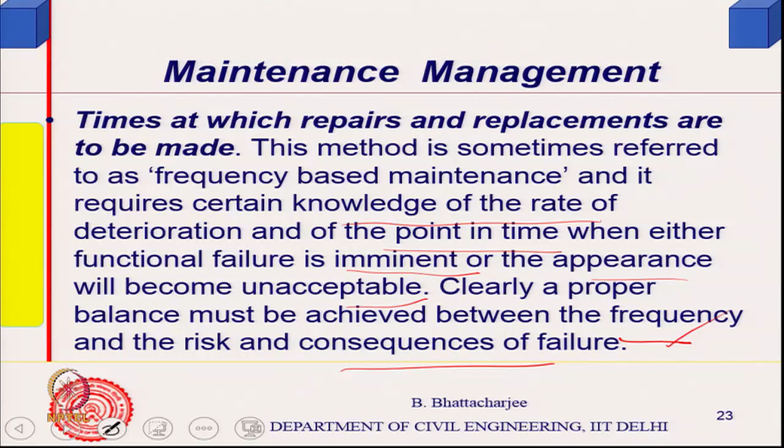So, based on that you decide a frequency: I will do the replacement of all the lamps at a given time. But at what percentage of lamp failure you will do a complete replacement will depend upon the cost implication if you do not do it, the indirect cost implication, because your production might stop. Not all situations will be similar; different functional buildings will have different issues. So, it has to be a balance between frequency and cost implication. If it stops your production, then obviously you will be more bothered.

In some cases, for example, the humidity not maintained in a textile or garment factory, where fibers change their dimension with relative humidity, the production system might get disturbed. So, these are the indirect implications. So, the same item might be put either in condition based or frequency based, but you will have to decide how you want to handle it.

Then there is a third variety, finally the financial criteria, which could take the indirect cost of not maintaining and the direct cost of maintenance. The more frequently I do it, my cost of maintenance will increase, but if failure of the system has a very strong repercussion, then obviously I have to take care of that.

Say in a hotel, for example, I've got to do it on a war footing basis, because the financial issue is involved: my return, the occupancy level, depends upon that. So in some cases it would depend on some sort of a sum related to the cost of some primary activity. The primary activity in a hotel is actually renting it out, right.

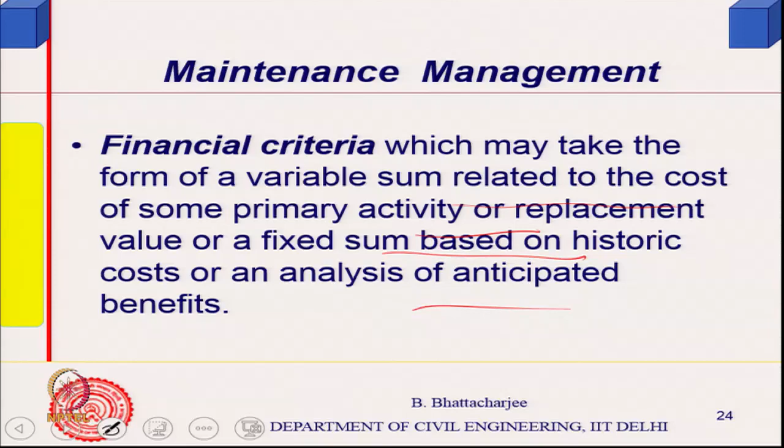So, if replacement affects that, or some fixed sum based on historic costs, if I do not do it, what will happen? So basically economic analysis will dictate. Some items will be simply based on economics. I said that carpets change in hotels, nothing goes wrong, but they do not want the same look, because people who come in have a better feeling. So, just change; nothing has really gone wrong, not condition based, just financial implications, and finally make it frequency based. So, this is how it would be done.

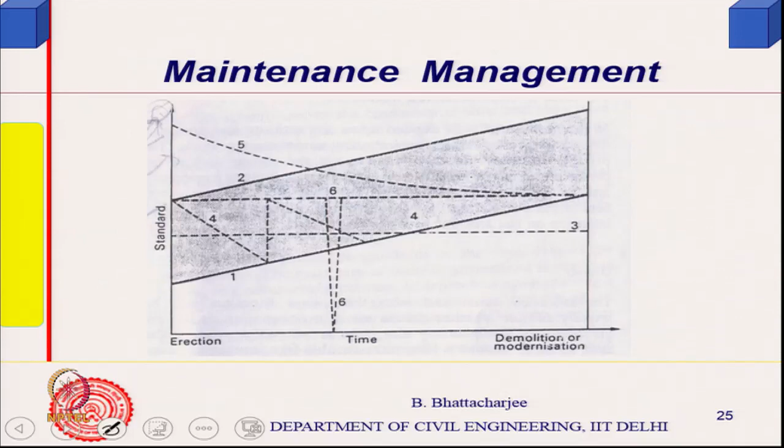So, this is the same diagram that we are talking about. Now, out of this same diagram, let us see how we go about it. But before doing that, we must also understand one thing, as I said, that financial criteria or frequency based or condition based, all of them, particularly the latter two, depend upon at what level I want to provide the basic maintenance objective.

For example, if there is no financial implication, I do not need a good level. Say some factory or real estate business is providing housing for a group which cannot afford a very high price. So, for them they will keep the standard at a low level. Therefore, your frequencies etc. will all get related to that, right. The maintenance objective will be different. So, maintenance objective, periodicity, everything depends upon the level. So, we must classify the level, and we classify it in 3 different levels.

Levels of acceptability: limiting this to habitable or working areas of a building, it is possible to distinguish 3 broad levels. This is a qualitative level. For example, the lowest level is that level where the immediate environment should not be directly harmful or uncomfortable. You are merely maintaining hygienic conditions and just comfortable conditions.

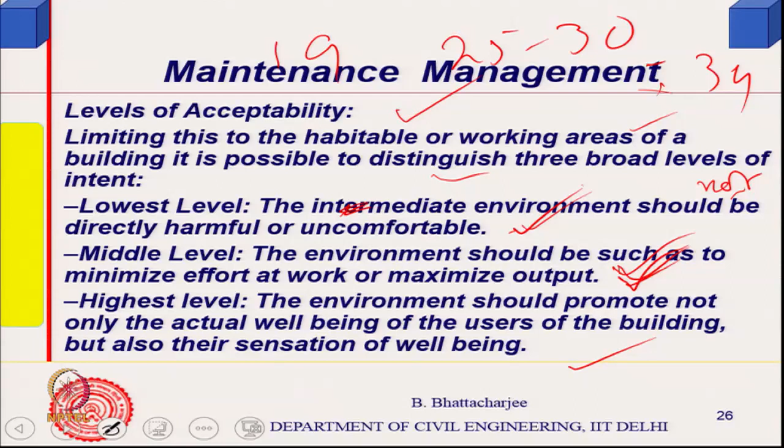where it should promote not only actual well-being, that means it shouldn't only maintain the comfort level, but you should also feel that it is actually very comfortable, or you take a pride in it. So, that is maybe the scenario of a 5-star hotel, where the pride is very important. Somebody says it's not only comfortable, I also feel that it's very comfortable. So, psychological well-being, a psychological feeling that it is better, not simply comfortable.

So, these levels of acceptability have to be decided. Then you can plan your periodicity. So, that is how we do it actually. Now, let us see how we find out periodicity for some of the items at least, right. These are the levels, but the examples I will take will not distinguish the level; they are general, some way how we find out.

Now, how can we find out? One is where I know the deterioration process, the slow deterioration process, and I bring it back. Roof covering is one such example. With roof covering, it is not a question of 2 years, 3 years, 5 years; I am talking of a time span of 60 years. So, 25 years might be required for roof covering to show up its problem. So, after how many years should I actually change the roof covering?

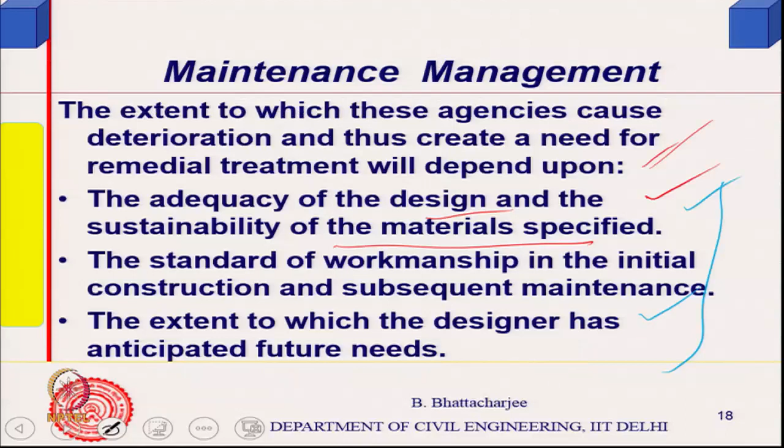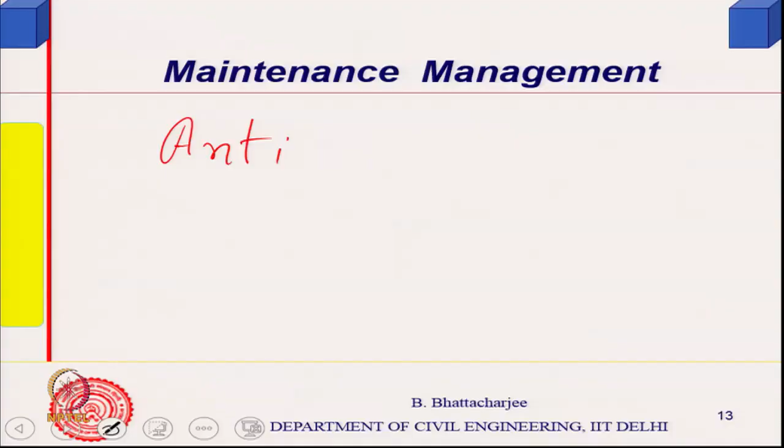So, first we take the case example of a roof covering, recycling of roof covering. In such situations we define something called an anticipated state matrix. Certain items we do like this, where the deterioration process is relatively slow, and when deterioration reaches a certain level, it is not economic to do the maintenance. So, we call it anticipated state matrix.

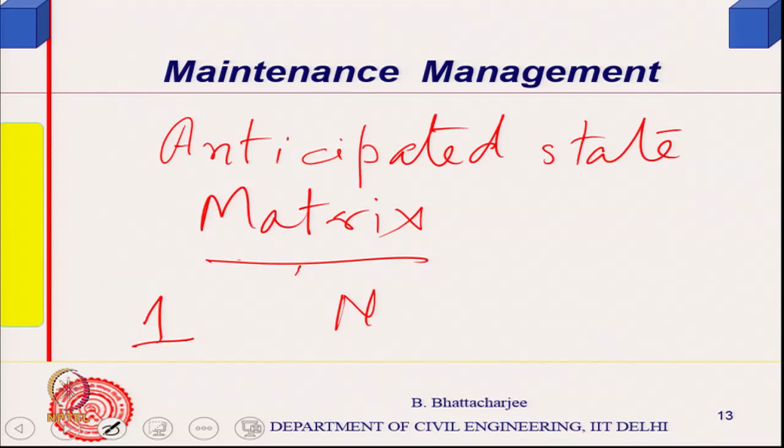Anticipated state matrix. Now, what is an anticipated state matrix? We define states: state number 1, no visible defect. Then 2, something like isolated. Now, in the case of roof covering, it depends upon which part of the country you are in. In the northern part you have a structural element, then an insulation element, then a waterproofing layer at different levels, and then some roof covering tiles right at the top.

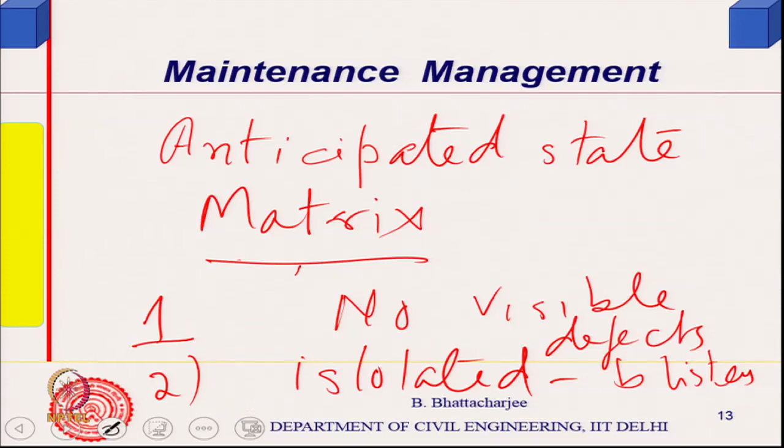And with these tiles, supposing moisture ingress has occurred, the tiles will start coming up, what we call blistering, as if blisters have appeared. So, isolated blisters. Then the next stage; so states are actually defined, and the extent also we might talk about. The tiles have gone away from the area, tiles have disappeared or something like that. So, these are anticipated states.

Right. In some cases the visible state could be visible internal insulation, something of that kind. So, you define anticipated states as you are likely to see once the roof has been constructed for many years. Now, this must come from past experience. So, you define the anticipated state matrix, we call it. So, anticipated state we define.

Then we talk in terms of: after 5 years, how much area will have no visible defect? Or it would be possibly 100% after 5 years. So, in each state after 5 years, how much percentage will be in isolated blister? So, one of the columns would be 5 years, then next is 10 years.

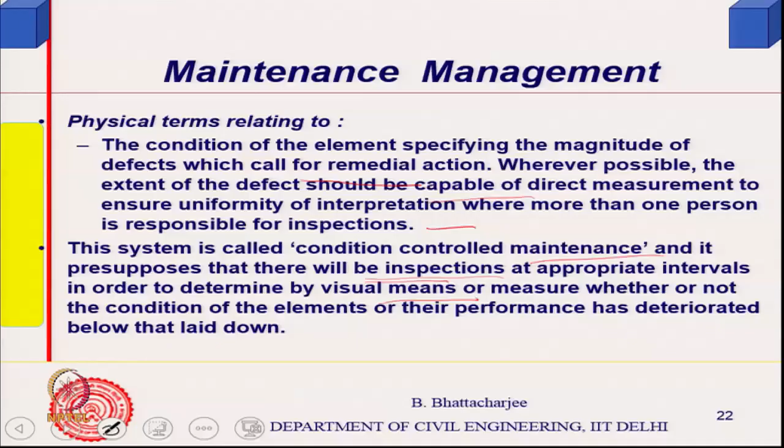Then in each state, how much area you see after every year, which I will show you in the table, that is the anticipated state matrix. So, this is basically the anticipated state, and this is the anticipated state matrix. So, 5 years, 10 years, 15 years, 20 years, 25 years.

So, the first state was no visible defect, say small isolated blisters, large blisters, slight cracking at the top, and then localized cracks, then extensive cracking and deterioration causing widespread leaks, that is another state. So, these are the states, and if there is no visible defect, remedial measures will be nil, cost involved will be nil.

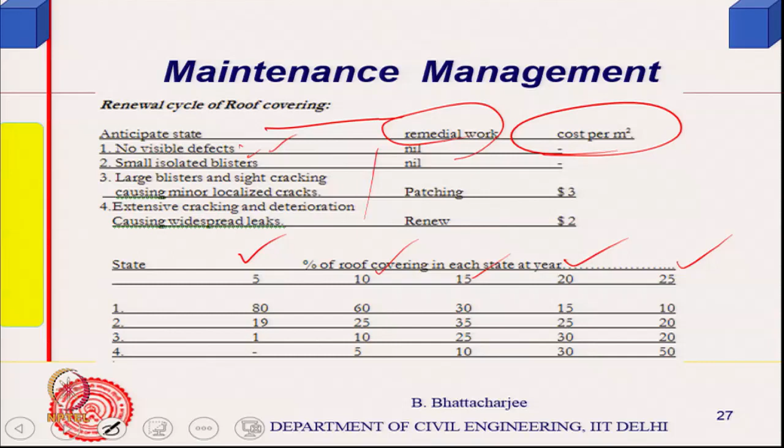So, in the first table you decide what are the states, and then what is its implication in terms of repair, what action you have to take, and how much is the cost per unit area. Then you make the anticipated state matrix. Now, you classify simply as states 1, 2, 3, 4. So, you write states here 1, 2, 3, 4.

After 5 years, generally you will find at least 80% in state 1, that means no visible defect, when we are talking of some 10, 20 buildings constructed together, which is the case, or a larger area of a single building. So, you will find 80-85% no defects, maybe 1% shows some blistering, it can happen, and 19% shows small blisters.

If you go to 10 years, no visible defect might be in 60% of the area, 25% might show isolated blisters, 10% might show large, and so on. And you will find that no visible defect goes on reducing with time, and extensive cracking, etc., will go on increasing.

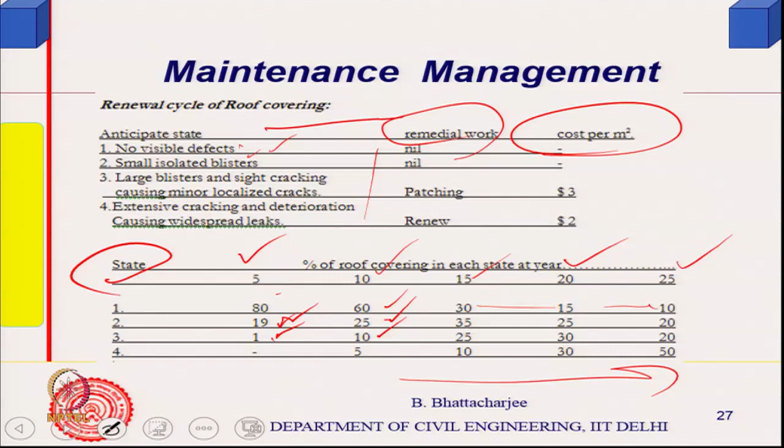Now, for no visible defect, you do not have to do anything. After 5 years, for 1% you will do a little bit of patch repair, and after 10 years also you might do patch repair. Now, I will just discuss this and again talk about it in the next class. If you do patch repair, it is usually costly per unit area.

Why? Because in patch repair the setup cost is high. Every time you do a patch repair, there is a setup involved. You call the people, they reach there, set up some material producing unit if it is cast in situ, then they do a small area and go away. On the other hand, if you replace the whole thing, it turns out to be cheaper, because the setup cost is only once, while each patch repair requires a setup cost every time.

So, you can compare the patch repair you are doing with replacement. Supposing you have got 50% area to be patch repaired, every 5 years, it would obviously cost you more. So, you say, forget it, just replace the whole thing. So, you have defined the periodicity, the time to do the complete replacement. You have to know the deterioration pattern and you have to have the data available.